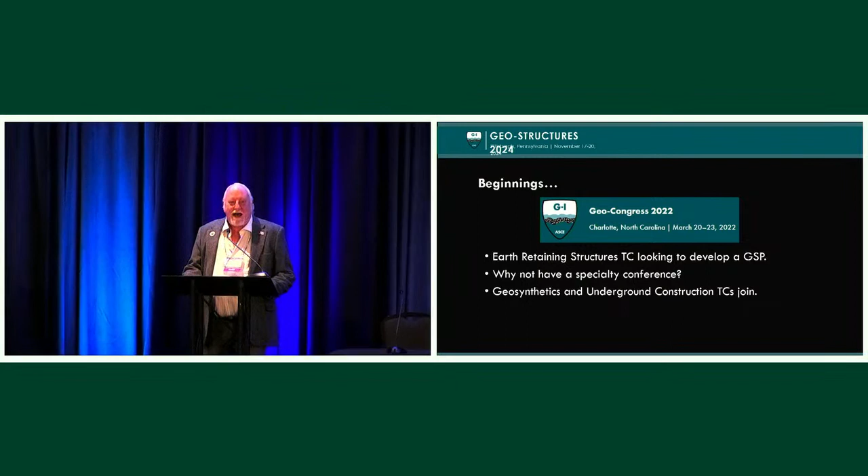I've had quite the odyssey getting us here. This all started back in Charlotte at Geo-Congress 2022. I was attending a meeting for the technical committee, Earth Retaining Structures, and the chair at the time said we need a geotechnical specialty publication. So having just gotten done my term as technical chair for GeoExtreme, I was like, run a conference. And that's a great idea. I was like, yeah, you can get them to write your proceedings, you know, and we don't have to spend a whole lot of work. Right, that's a great idea. Jay, can you take that on?

And I had yes tattooed on my forehead, so why not have a specialty conference? So here we are, like 2.5 years later. We were able to convince the geosynthetics and underground construction technical committees to join in, and it's been quite the odyssey for us and quite satisfying.

But here we are, 2.5 years later. We have 34 exhibitors in the 2 exhibit halls. You won't even notice the difference between the 2, it's all right back behind me. We had 59 papers finally submitted. We have 7 keynote lectures for you, 4 panel sessions, and 2 session panels, which is going to be more informal, and that will be happening concurrently with the technical sessions.

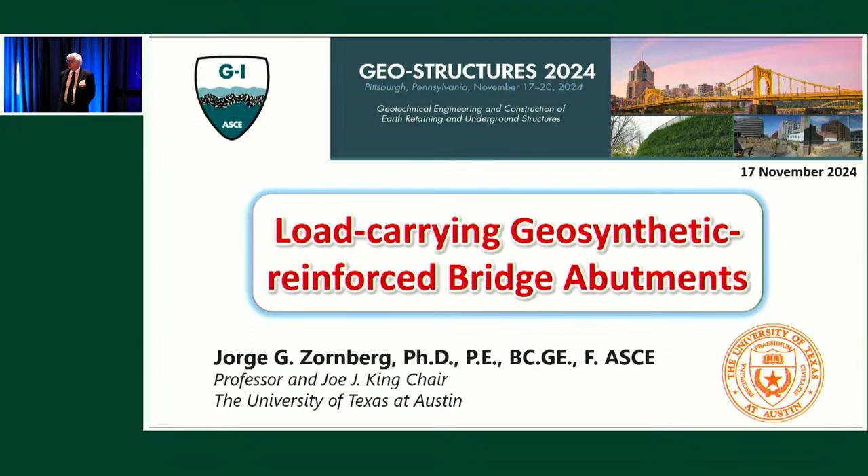My objective here is to tell you that there are many of them that have been built. So if the Department of Transportation tells you, no, I don't want to be the first one building it, there are many that have been built. There are many advantages, and I'm going to show you those advantages in light of structures that have been pioneering in this technology. So not only are there many of them, but they have been built for quite some time, and I'm going to show you the good performance we've had in these structures for 30+ years.

But first, let me tell you, maybe there's one aspect that is more complex than it should be, and that is the terminology. So here you have a wall.

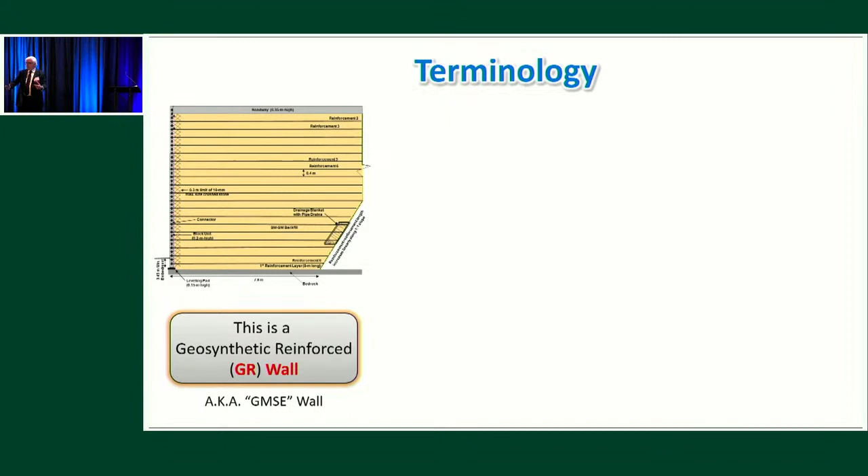This is a retaining wall. I'm going to call it here a geosynthetic reinforced wall. Sometimes we would call it an MSE wall, or mechanically stabilized earth wall. If it has geosynthetic reinforcement, we can call it a GMSE wall. This is the wall you see when you drive by Pittsburgh—you're going to see many of these walls in bridge abutments.

Now, this is still a wall. It's a bridge abutment in the sense that it serves as an approach to a bridge, but we design it as a wall because the load from the girders, the load from the bridge, is transferred more often than not directly to bedrock through deep foundations. So this is still a wall, but I'm going to call it here a geosynthetic reinforced bridge abutment.

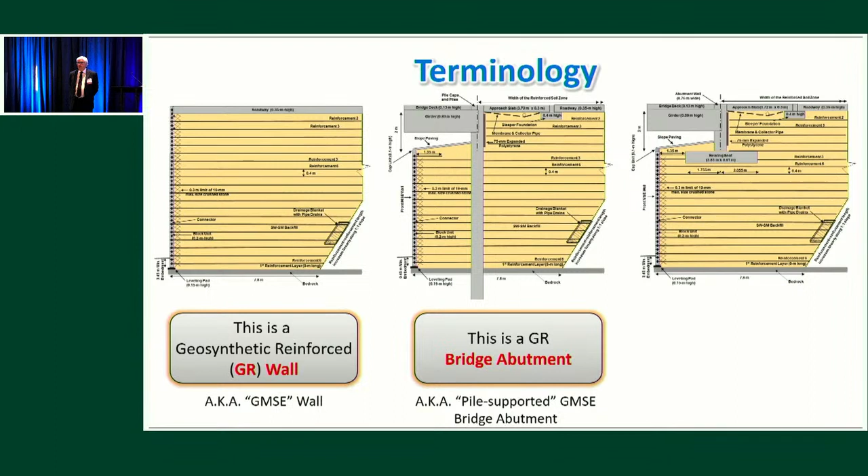This is the most common type, but this is not what we're going to be talking about today. We are going to be talking about a structure in which the load of the bridge is transferred to the surface, to the top of the retaining wall. This is what we're going to call a load-carrying geosynthetic reinforced bridge abutment.

Again, sometimes we'll see it called a true abutment, sometimes a load-bearing GMSE bridge abutment. But how do we design these structures? Because these are no longer just a retaining wall—this is also a reinforced foundation.

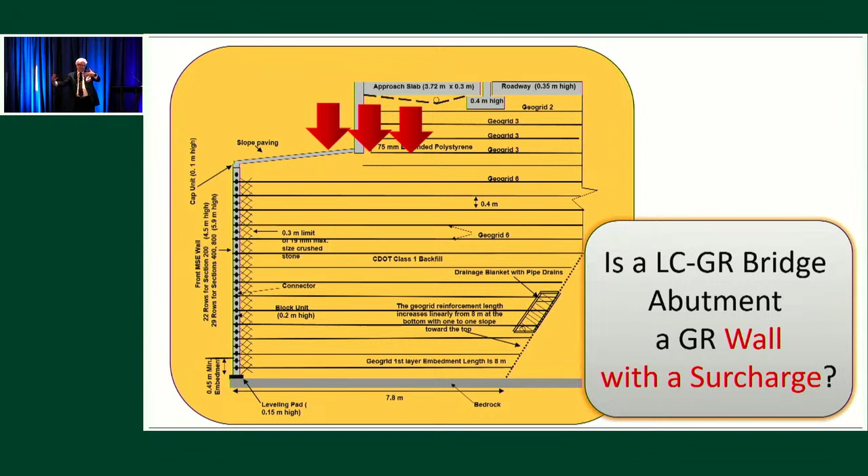So should we design them as a wall with a surcharge? Some of our design guidelines essentially consider that—they design this structure as a wall with a surcharge. Or, since both of them are geotech but come from different points of view, should we design it as a foundation? As a foundation, we may consider plate load testing, bearing capacity versus displacement versus settlement. Or should we design it as a foundation without lateral support? The truth is both are correct, but they represent different points of view for the design of the same structure.

Now, I am not going to be talking too much about design. In this conference, Professor Jie Han will be talking about the difficult, technical aspects related to the design of these structures. Instead, my focus here will be on the benefits and long-term performance, and the characteristics of these structures. Let me wrap up this issue about terminology.

This is the world of GMSE walls, geosynthetic-reinforced walls. Within this world, we have a fraction of them that serve as bridge abutments. Only a fraction of these geosynthetic-reinforced bridge abutments are load-carrying. The great majority that you'll see are really abutments designed as walls, and only a fraction of them—which will be the focus of this presentation—are going to be carrying the load of the actual bridge.

Now, it may get a little bit more confusing. I'm not sure if you're familiar with the concept of integral bridges.

Integral bridges are bridges that do not have joints, and the substructure is integrated with a superstructure. Now, some of the load-carrying geosynthetic-reinforced bridge abutments are going to be integral as well.

In the US, there has been a very productive, very important initiative that led to what we call the geosynthetic-reinforced soil integrated bridge system. Integrated is not integral, but many of them, and I'm going to walk you through what these are, and I'm going to consider them a subset of the load-carrying geosynthetic-reinforced bridge abutments.

With this in mind, I must tell you that not everyone agrees with this terminology. This is for internal consistency. This is what I am going to be using here today. But the focus is going to be on this green subset of load-carrying geosynthetic-reinforced bridge abutments.

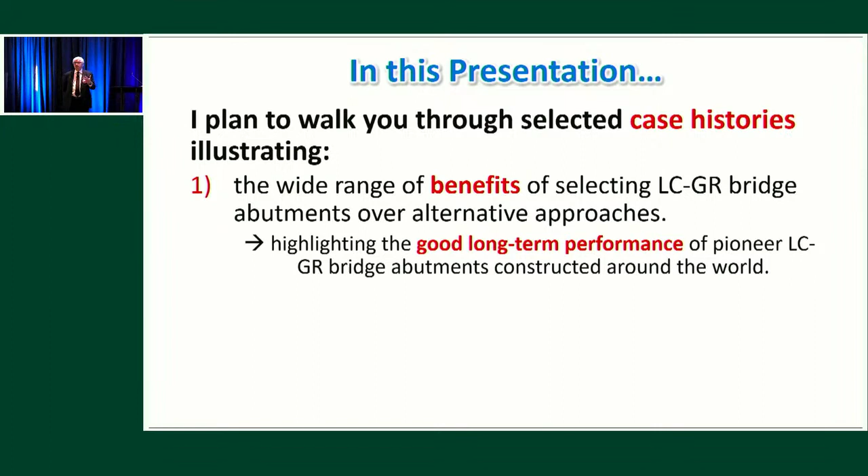In this presentation, I'm going to focus a lot on case histories. The idea is that these case histories will document the benefits of choosing this type of structures versus more conventional structures, such as those that carry the load directly to deep foundations. I'm going to highlight those that have been pioneering, early structures. Why? Because these are already 30-plus years old. And if there were any questions about how these structures were going to perform, now we have good information about this long-term performance. Let me give you some heads up.

Regarding benefits, let me first list those benefits, and then I'm going to walk you through them one by one in the form of case histories. First, they are very often selected because they minimize or eliminate the infamous bump at the end of the bridge.

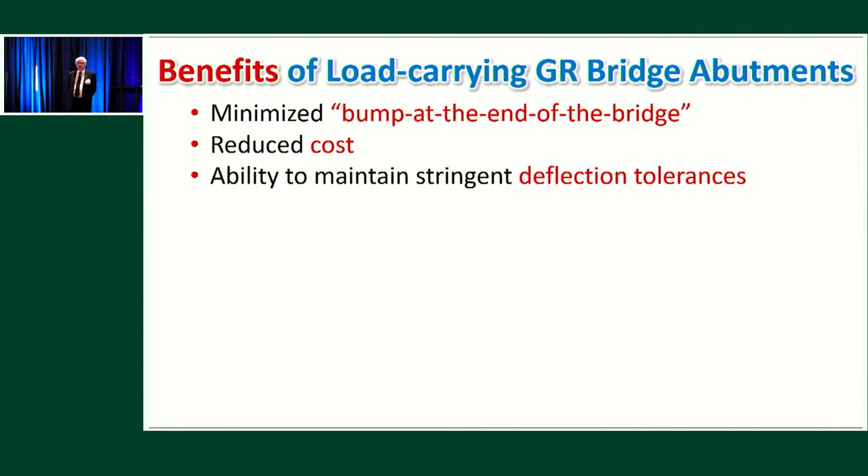A very important reason. Another very important reason: reduced cost. Also, in some cases, they are particularly suitable to maintain stringent deflection tolerances. And we're going to see something about their seismic performance. They are particularly flexible structures, and they perform particularly well under seismic loading.

Finally, I'm going to show you some examples about complex constraints and the need to change unexpected field conditions. All of this, while at the same time, I'm going to show you their improved long-term performance. There are other benefits that I'm not going to focus on in this particular presentation, but for each one of these benefits I do focus on, I'm going to highlight their improved long-term performance.

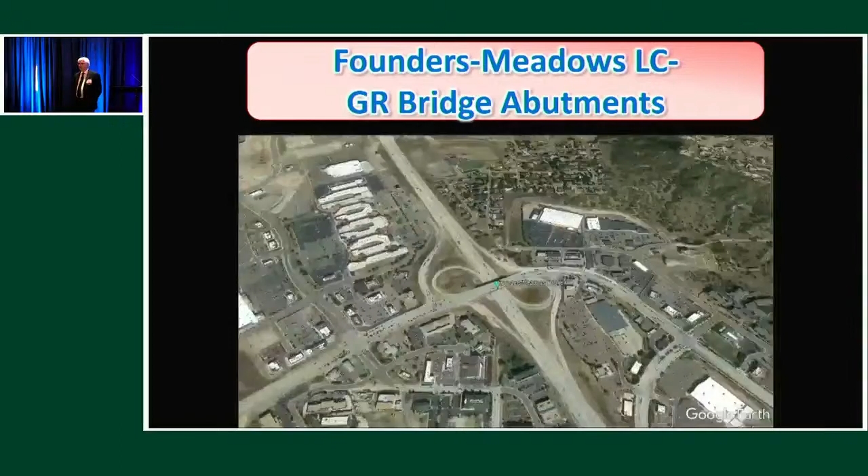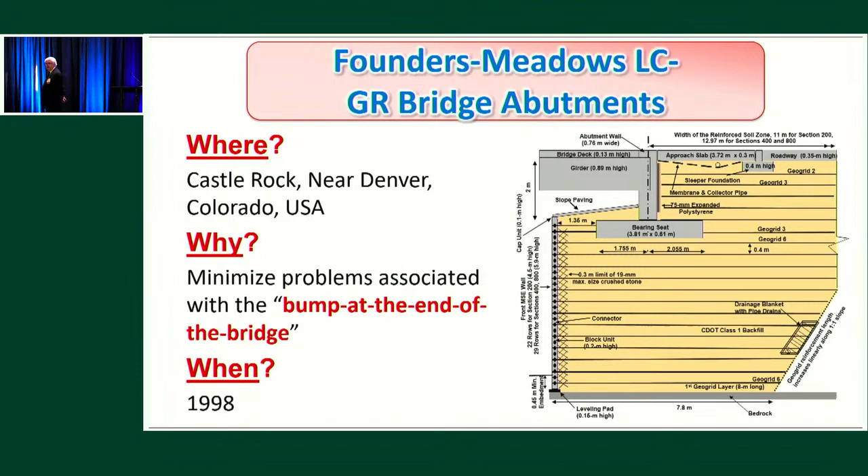It was completed in less than a year in terms of construction. This was a six-lane system, accommodating six traffic lanes and sidewalks as well. It was heavily instrumented. Some could argue that because there were so many instruments, they added to the reinforcement of the structure.

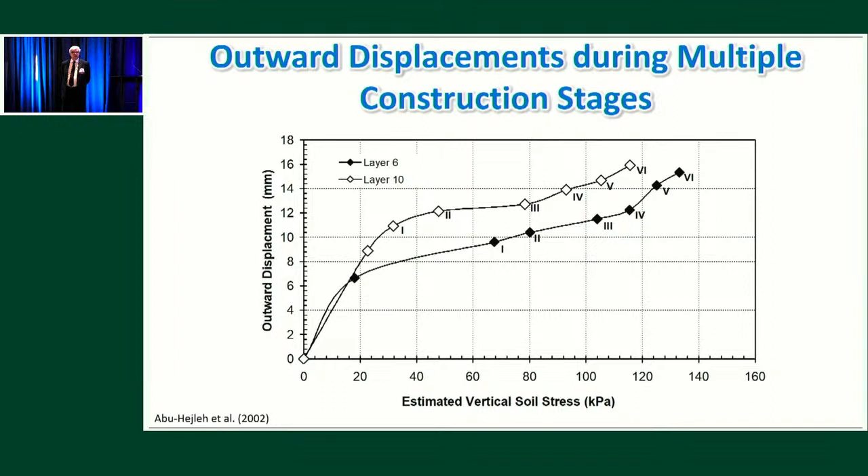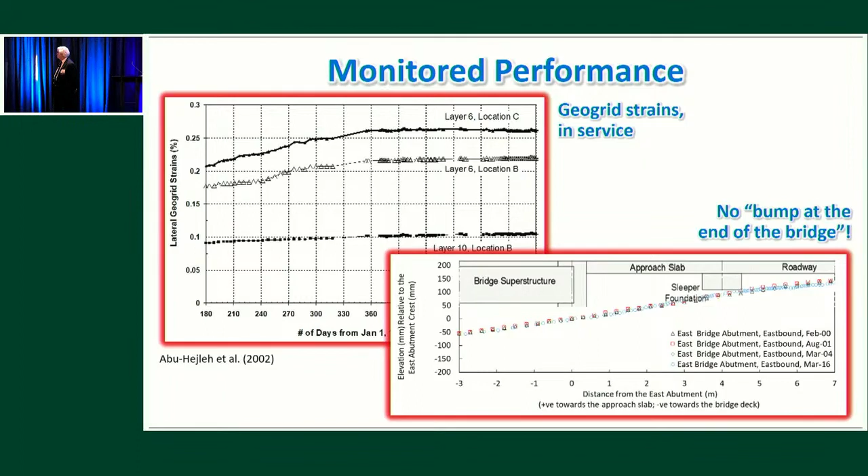So what is the significance of this first structure, the Founders-Meadows load-carrying geosynthetic-reinforced bridge abutments? This constitutes the first type of this bridge constructed on a major highway. Monitoring results have shown particularly good performance overall, and specifically, there has been no sign of the development of a bump at the end of the bridge.

So this was one type of structure here in the US, and I'm going to show you structures all over the world, but let me start here with the US.

The second one I'm going to show you is also the first of its kind, the Bowman Road load-carrying geosynthetic-reinforced bridge abutment. This is in Defiance County, Ohio.

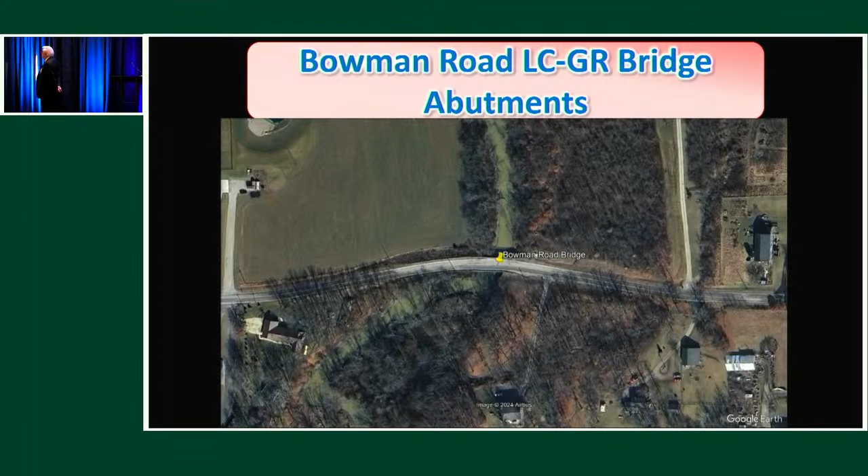This is a comparatively small structure, meant to be designed for low-volume roads and bridges on low-volume roads. This is how the structure looks; some of you may recognize this as a typical cross-section of what we now call the GRS-IBS type of structure.

The main motivation for this system was to reduce costs. The county engineer was looking for alternatives to replace many of the bridges in the county without the cost associated with that undertaking. Working with the Federal Highway Administration, this ended up being the first of its kind, constructed in 2005, shy of some 20 years ago.

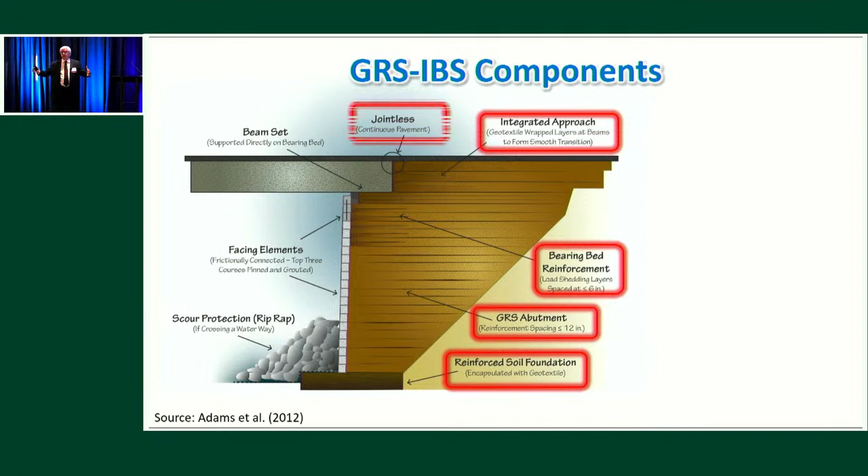This is the typical cross-section of this GRS-IBS system. There are several components; it's a very prescriptive system with very defined components, very specific materials, very specific geosynthetic types, and some limitations in terms of height, span length, and other characteristics of the structure.

Here we have the current site selection criterion. This is meant for bridge spans less than 140 feet, wall height less than 30 feet, comparatively low scour potential, and in principle either competent or improved foundation soils.

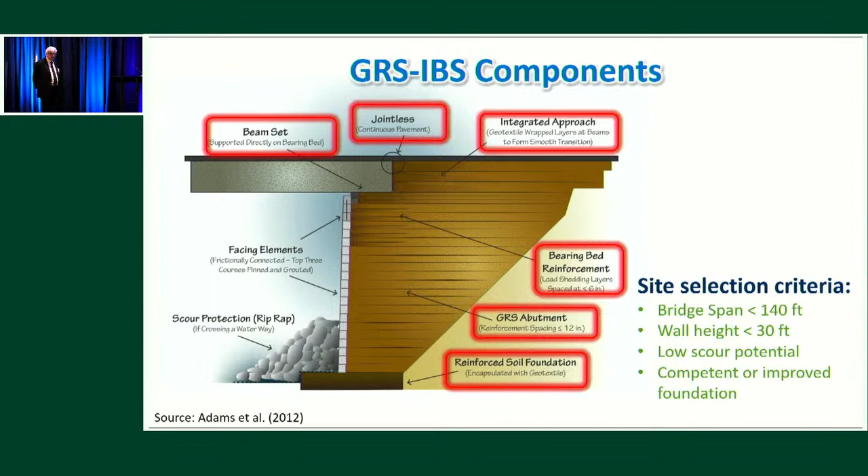Now the important aspect, and this comes directly from Warren Schlatter, the county engineer who originated this initiative in Defiance County: this was constructed leading to a reduction of the span length rather than having the spill-through type of bridge. The fact that they ended up with vertical walls reduced the span length, which led to significant cost benefits for the structure.

It was so simple to construct that it was actually built using the county's in-house labor and equipment. Here we have a view of the actual girders being placed. This led to a decrease in construction cost on the order of 21% compared to conventional bridges, and it opened in 47 days. Considering this was the first one, Mr. Schlatter indicates that now they can build the same type of structure in perhaps half the time, based on the experience they've gained over the years.

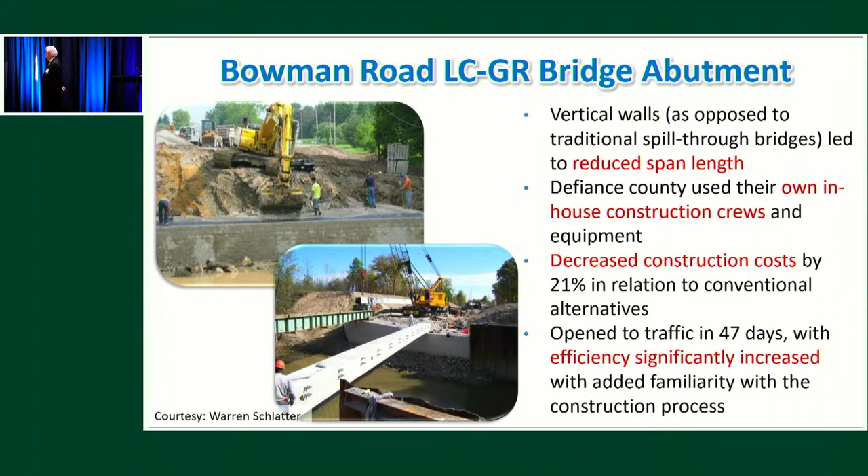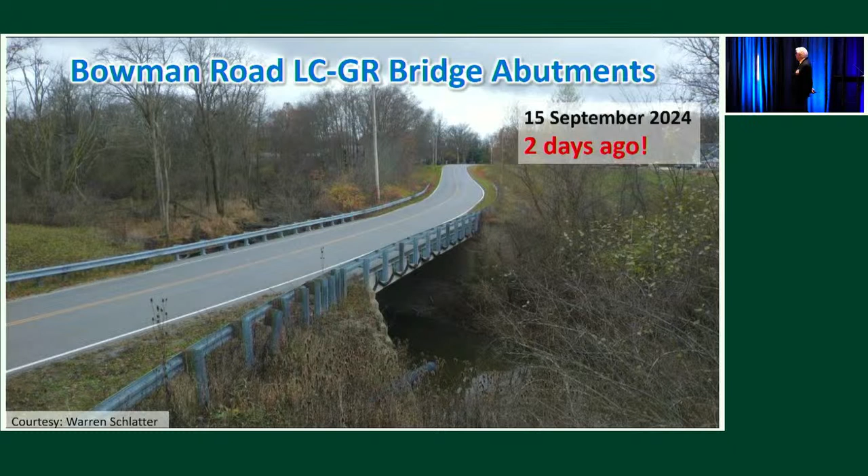This is a view of the structure in August 2005, some 20 years ago, right after construction. But this is from September 15, 2024—today's the 17th, so 2 days ago. This is how the structure looks essentially right now. It has performed excellently over the years.

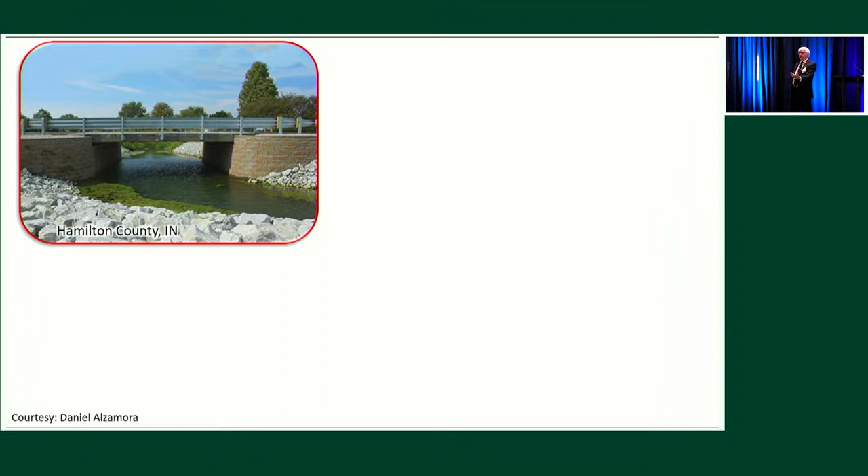And this was implemented in a series of additional structures all over the US. Here I'm just showing you some of the structures that followed this pioneer structure in Defiance County.

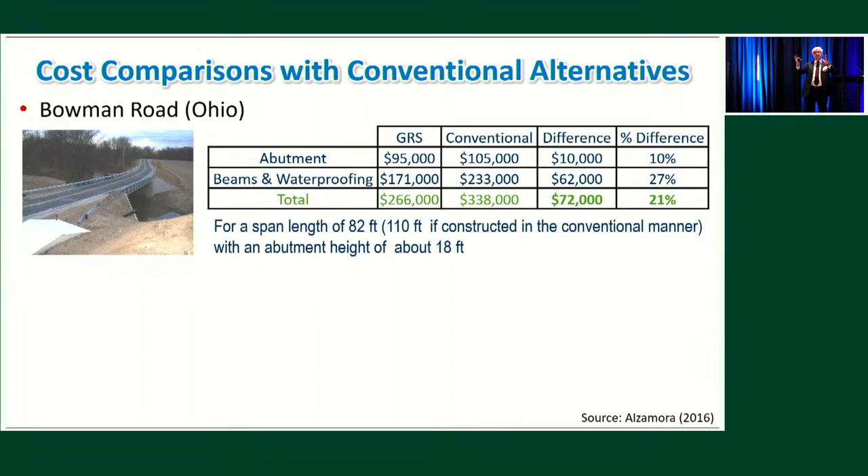When it comes to comparison of cost, this is coming from Daniel Alzamora. This is how they came up with the cost benefits of this structure in relation to conventional structures, some of it coming from the abutment itself, some of it coming from the fact that you're decreasing the span length in comparison to other alternatives. But over the years, these benefits can be even more improved because of the additional expertise gained by refining the construction techniques and having crews that are more experienced with this particular system.

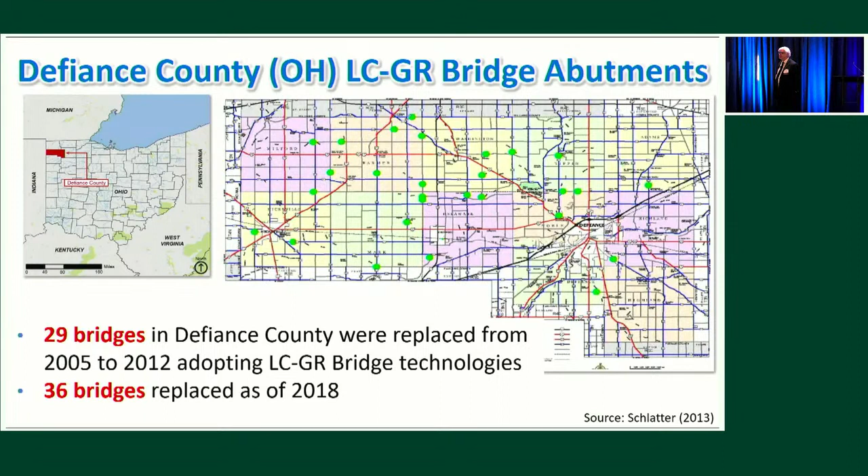That's why Defiance County is probably the county today with the most GRS-IBS structures in the nation. Defiance County, in the northwest of Ohio, has had some 36 bridges replaced using this technology as of 2018. And it's not only in Defiance County, but Pennsylvania is one of the states that has benefited from this type of structure the most.

So what is the significance of the Bowman Road load-carrying geosynthetic-reinforced bridge abutment? This project constitutes the first GRS-IBS. It validated the objective of its selection, which is a cost-effective solution.

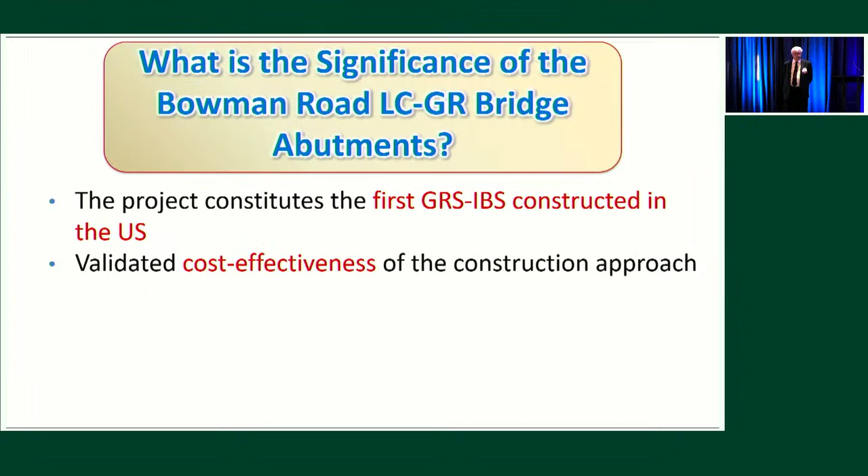Monitoring results - this structure was monitored. Some other structures were more significantly monitored, and they confirmed the good performance of the system. This actually became the precursor of what ended up being the Every Day Counts initiative.

You may wonder what is so different between the two different structures that I showed you, and they are different - we design them differently. I'm not going to get into the details, I'm just going to tell you what the differences are in the design. This is a little bit of a sidetrack, but even though my focus in this presentation is the case history, I'll show you a bit about this.

So what design methods do we have available in the US for load-carrying geosynthetic-reinforced bridge abutments? What are the main differences between one design method and the other? Many would argue that the main difference is that in the GRS-IBS, a very important characteristic is that the vertical spacing of the reinforcements is particularly small. According to the guidelines, it needs to be less than a foot - more typically 8 inches. That's the vertical spacing of the structure. Some would argue that that's the main difference.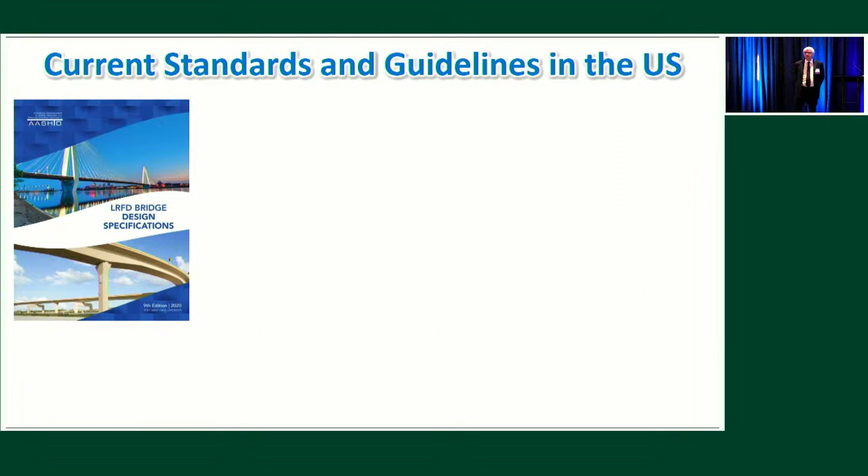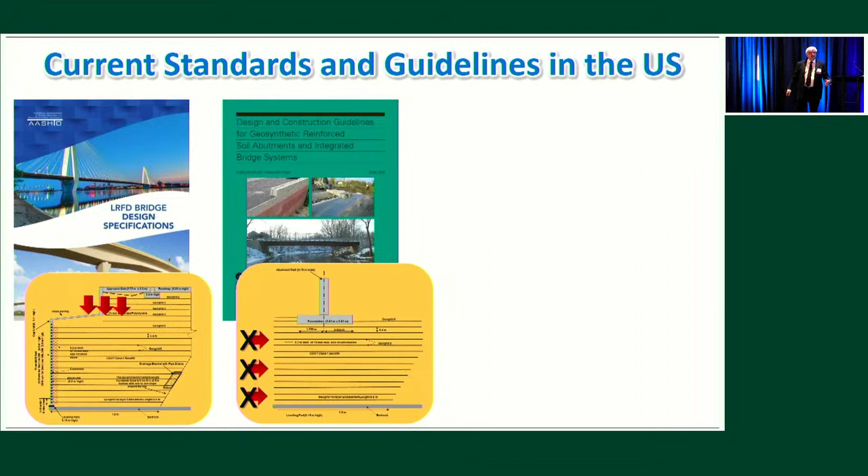That's not how I see it. The way I see it is that the AASHTO approach considers the design of a wall with a surcharge, and that's how we build the design method that follows into this. On the other hand, the GRS-IBS guidelines look at this from the perspective of a foundation - what is the load settlement response of this type of structure? I would argue there is no right or wrong. Both approaches have merits, either starting as a foundation and checking that the settlements are adequate, or starting as a wall and checking that the settlements are adequate, or starting as a foundation and making sure that the lateral supports and internal stability are adequate.

Very recently, or reasonably recently, I want to call your attention to 2 references that attempt to reconcile these potential differences between these 2 design guidelines. One is the result of an NCHRP project that essentially led to some recommendations for AASHTO implementation on how to handle, within the AASHTO framework, cases with comparatively small vertical spacing. If you Google it, you're going to pick it up very quickly - it's NCHRP 24-41.

Or alternatively, you can go to the very latest version of GEC 011, which also incorporates some of this information. This is a 2023 reference, and if you type in Google 'HIF 24002', you're going to find this very latest version - both of them telling you the outcome of some recommendations on how to handle, within the AASHTO framework, comparatively small vertical spacings.

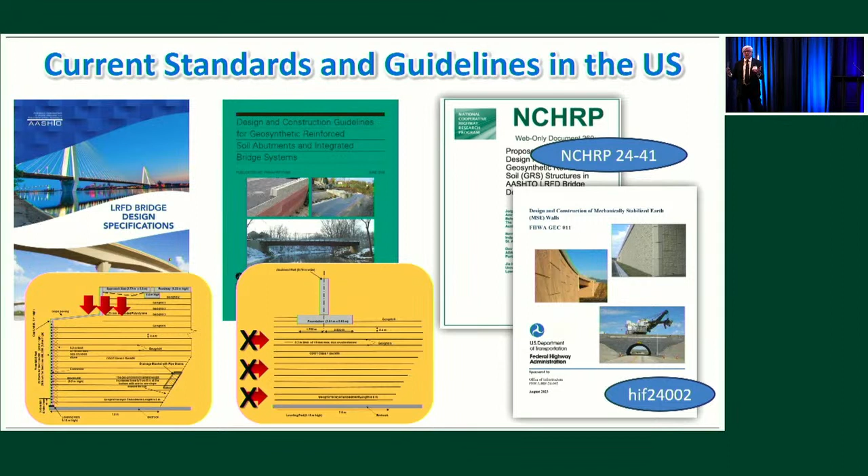But in a nutshell, essentially, the vertical spacing may affect some aspects of the determination of the maximum of the ultimate tensile strength that we adopt for design, and several other aspects. For example, for the maximum, the ultimate tensile strength in the convention, and by the way,

AASHTO nowadays has several different systems for you to design MSE walls. However, when it comes to load-carrying geosynthetic reinforced bridge abutments, I would say, and maybe G can correct me if I'm wrong, the only one that would technically apply is still the simplified method.

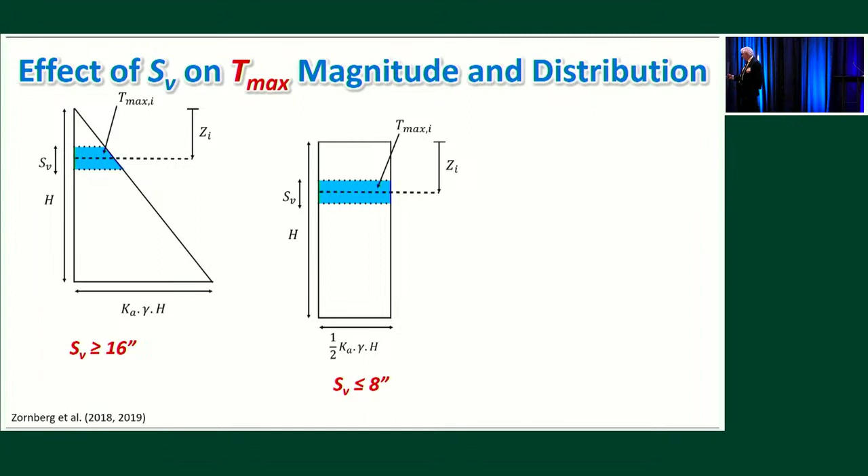And in this particular case, we do have the conventional way of defining the maximum tension in the different layers in the reinforcement. Essentially, this refinement, the proposed refinement, indicates that we're going to go from this distribution to a uniform distribution with depth to define the maximum tension in the reinforcement, depending on whether the vertical spacing exceeds 16 inches or is below 8 inches, and somewhere in between if your vertical spacing is somewhere in between.

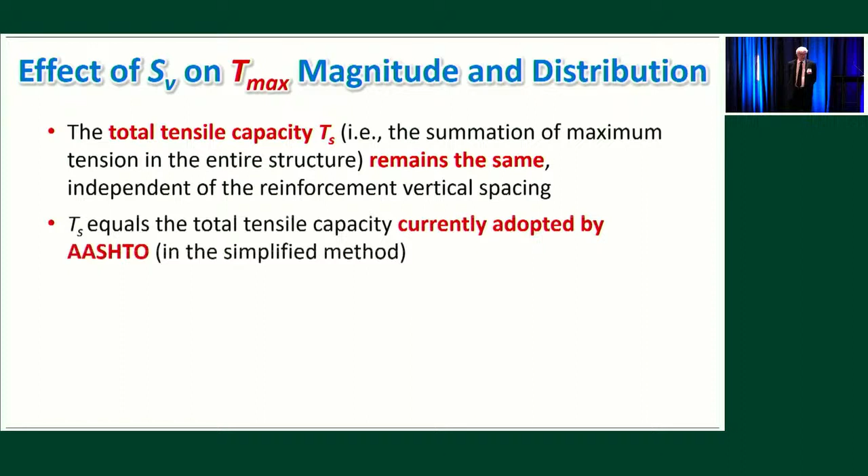The main aspect in this case is that in both cases, the tensile capacity, that is the summation of all the reinforcement forces, remains the same. All right, so this was the small sidetrack that I wanted to tell you about the design. But again, I'm back to my main route, which is not regarding design, but is about benefits.

So we talked about two benefits. One is minimizing the bump at the end of the bridge. The second one was cost. Let me tell you about the third one, and I'm going to take you to Japan.

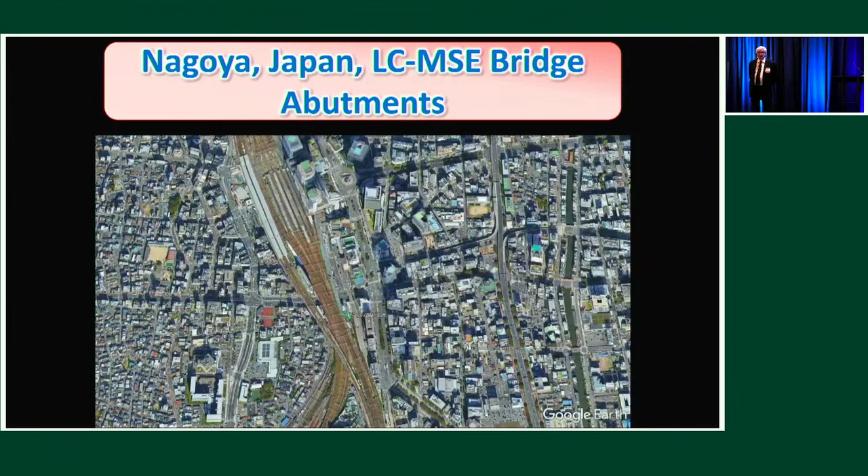Very different type of structure than the one that we designed here in the US. This is going to be in Nagoya, Japan. In Japan, the design of these structures, actually for railway systems, is particularly well established. I'm going to take you to the first of this type of structure, which is in the Tokaido Shinkansen rail line. This is the bullet rail line in Nagoya, Japan. And one of the main reasons for the selection of this type of system was the need for this high-speed railway to maintain very tight tolerances.

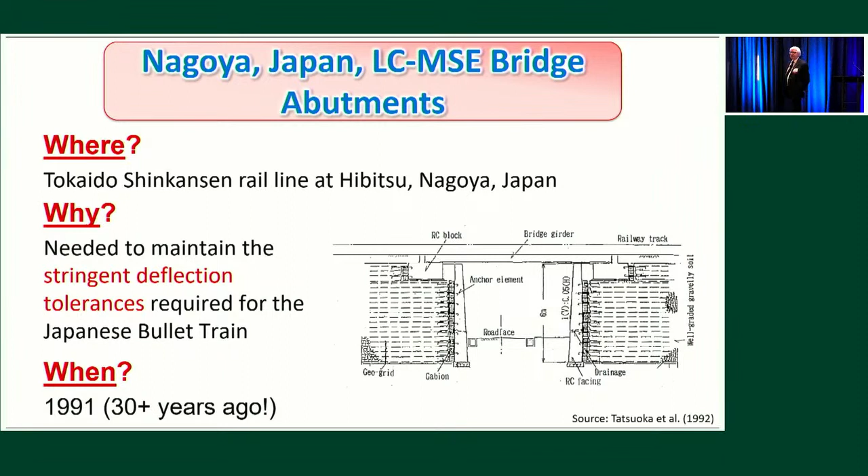This is 30 plus years, probably the oldest of these structures, what we're calling here in this presentation load-carrying geosynthetic reinforced bridge abutments.

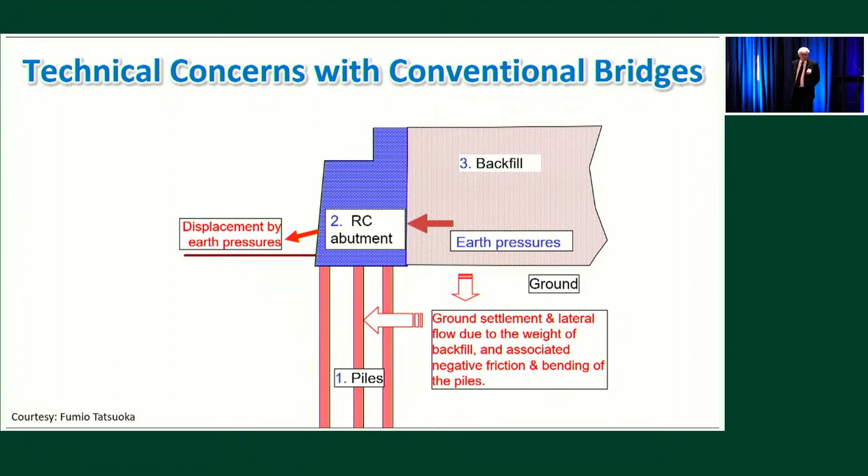I have borrowed this following slide from Professor Tatsuoka that highlights the different potential concerns when designing a bridge abutment with conventional pile foundation. So we're going to have the lateral earth pressures acting, and these lateral earth pressures will lead to settlement, potentially down drag on the piles, potentially lateral flow on these piles, lateral displacements on the facing of the reinforced bridge abutment, and on the reinforced concrete abutment.

And here we have the bearings. Unless this is an integral bridge, you're going to have the significant concern of maintenance with these bearings. And particularly when we have an earthquake, all these impact of settlements and lateral earth pressures and concerns with the maintenance of the bearings are exacerbated.

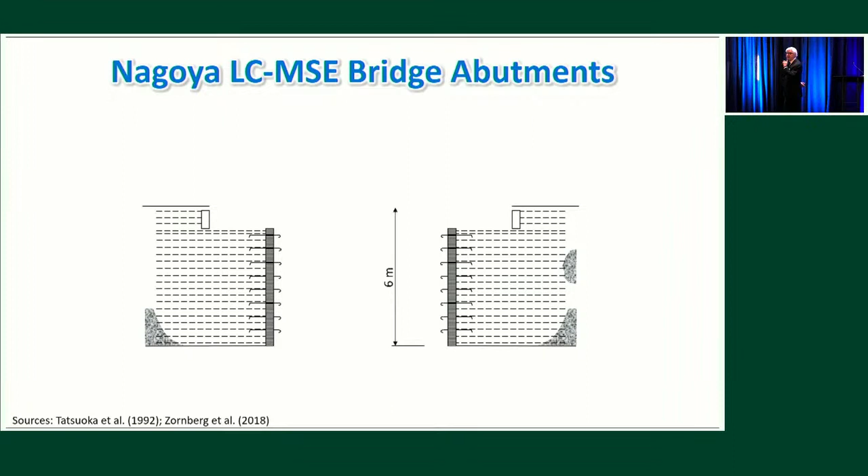So, but in this particular case, I'm going to walk you very quickly through how this structure is constructed, very differently than what we do. And the main difference is that they rely heavily on the rigidity of the facing. Most of our designs in the US, we have a facing and we need it, but typically we do not account for the contribution to stability of the facing system. That's not the case in Japan.

So this structure, this is a geosynthetic, in this particular structure was a geogrid reinforced wall. And notice that in the facing, there are some gabions. Actually, this was wrapped around geogrids that had particularly clean gravel at the facing. But notice that in this facing, we have some anchor elements.

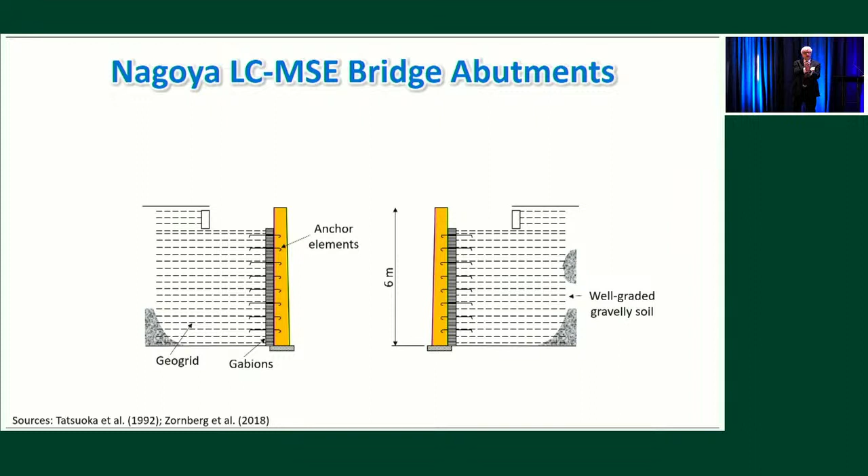The reason that they have these anchor elements is that they are going to subsequently cast in place a rigid full height facing. These full height rigid facing will be integrated to the reinforced wall structure. So now when we load this system, part of the load is going to be taken by the rigidity of these rigid full height facing. So here we have the footings, and eventually we have the girders for the bridge, and this is typically for railway systems.

So here we have the railway tracks. So this is how this particular system was typically constructed.

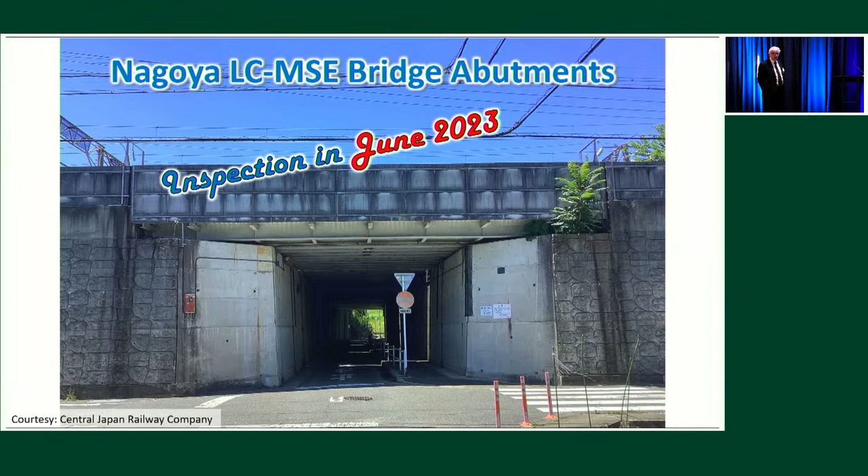It successfully addressed the main objective of this system, which was to control the tight deflections needed for the railway system. It probably corresponds to the first of its kind. Some would argue the concept, but I would still consider this a load-carrying geosynthetic-reinforced bridge abutment, even though some of the load is transferred to the foundation through the rigid facing.

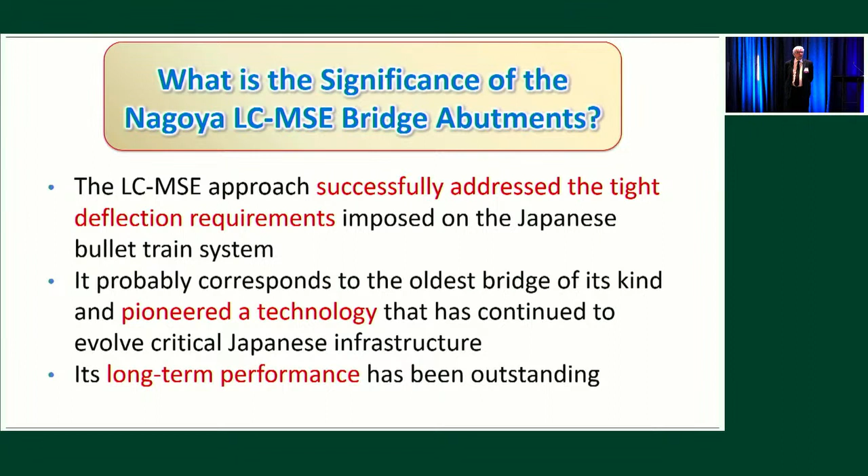And the long-term performance has been outstanding. This was the first out of 3 generations of this type of system, but they have all been intended to support the railway system, the high-speed railway system in Japan.

Next, also in terms of benefits, I'm now going to take you to Chile. This is the San Francisco, load-carrying geosynthetic-reinforced bridge abutment. In this particular case, this structure was constructed as an overpass for a railway system in the O'Higgins region in Chile. The main reason for this selection was to satisfy both static and seismic stability conditions.

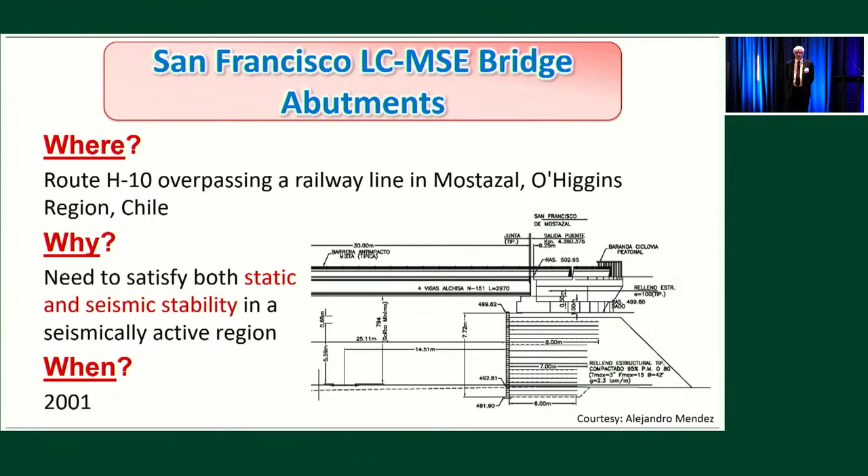Long ago, in 2001, 20 plus years ago. This is a view of the structure during construction. Even though this is in Chile, the method for construction and the characteristics are very consistent with what at the time was the ASCE design method. This is a view of the bridge, again, during construction, and this is right after construction of the structure in 2001.

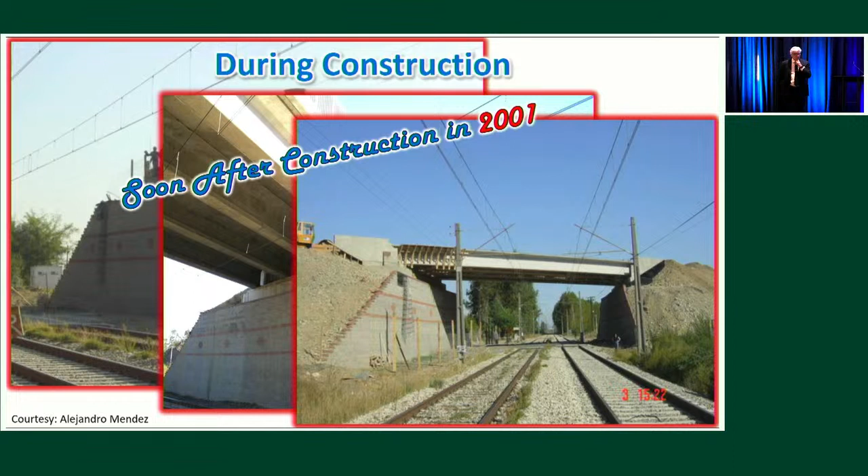Something important happened in this particular structure. In 2010, 9 years after construction, Chile had over 500 victims from a significant tsunami. This was an 8.8 magnitude earthquake, and this is the epicenter of the system, with significant problems in Santiago.

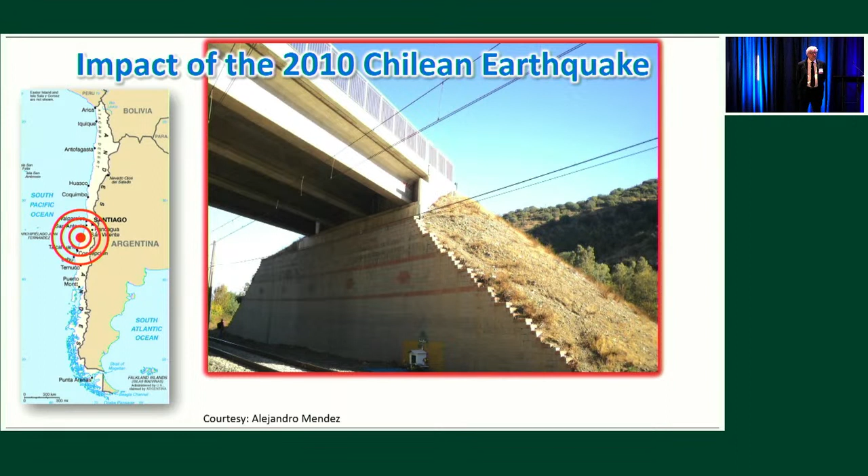This is a view of the structure inspected right after the earthquake in 2010. Oh, by the way, I didn't tell you, but this had a skew on the order of 35 degrees. And the great majority of the bridges that had a skew had failed in this particular earthquake. And here it is.

Other than some cracks attributed to the significant skew of this bridge, this was a bridge that was just a load-carrying geosynthetic-reinforced bridge abutment. It was oriented east-west. And look at the construction. I'm going to call your attention to these vertical steel bars.

They are called - I don't know what they call it - they call them seismic bars. My friends tell me that the rationale for these seismic bars is that essentially they are supposed to restrain some vertical component of the acceleration during the earthquake. But look - no impact on these seismic bars in this particular structure.

But I'm going to take you to another structure, also oriented east-west, constructed the same year by the same contractor, 2.5 kilometers away, some 1.5 miles away from this structure, essentially subjected to pretty much the same peak ground acceleration.

And look at it. This didn't have the skew that the previous structure did have, and there was a significant problem with the performance after the earthquake, which was very common in many other bridges affected between the epicenter and Santiago. And look at this - these are the seismic bars, and this is the Las Mercedes overpass.

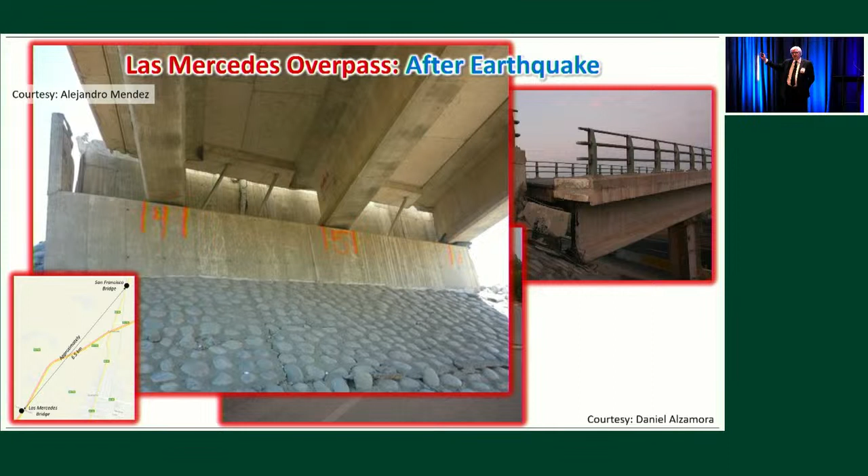The seismic bars are clear evidence of the difference in performance between this conventional reinforced concrete structure with piers, compared with the performance of the load-carrying geosynthetic-reinforced bridge abutment. Very significant difference in the performance, and perhaps one additional, but important, data point in the performance of these structures under seismic excitation.

And a year ago, so here, other than some artwork in this particular structure, this is still performing excellently after some 20 years since its construction.

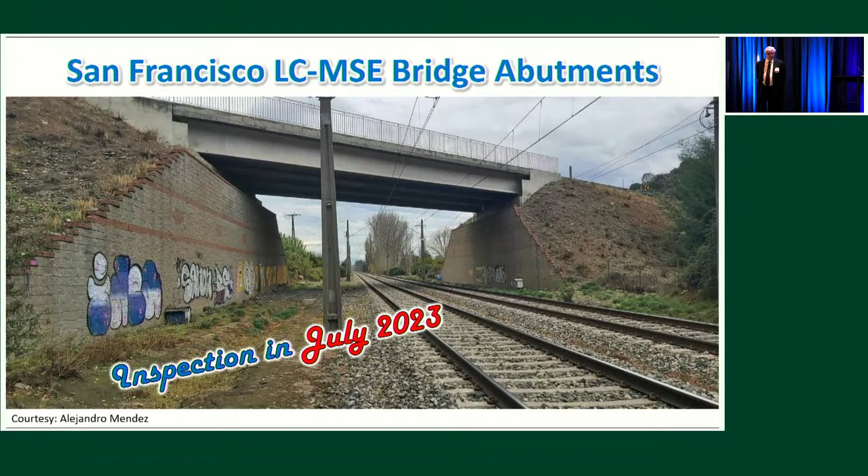So the significance of the San Francisco load-carrying MSE bridge abutment: it successfully demonstrated the suitability of this system for their performance, including seismic stability. This was tested and successfully passed the test that many other bridges did not pass after the 8.8 magnitude earthquake in Chile in 2010, and recent inspection after 20 plus years has shown the excellent long-term performance.

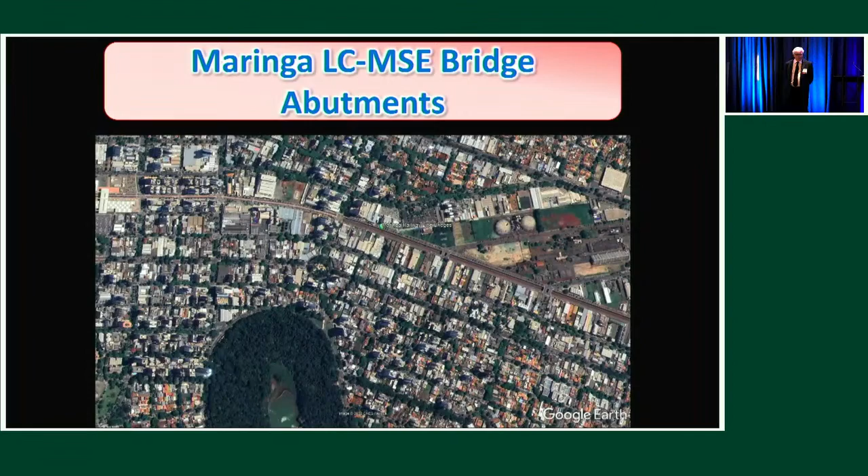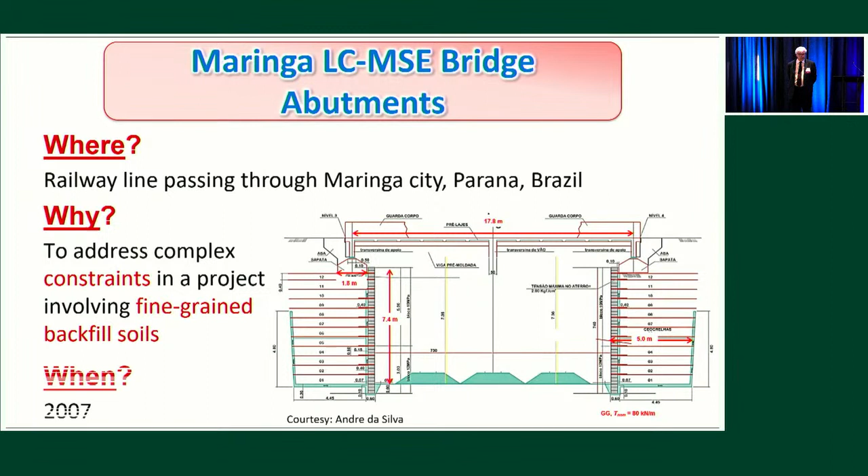One more case history, and I'm going to take you to Brazil. This is the Maringá load-carrying MSE bridge abutment, in the state of Paraná, Maringá city. This structure was particularly relevant because of very significant construction constraints. In addition, it was constructed using backfill that would not meet the requirements for backfill here in the US, comparatively fine-grained soil, back in 2007.

This is a trench that had to be built. There was an undergrade railway, and the idea was to build a number of overpasses through it. Essentially, they excavated first on one side, constructed that side, and then on the other side as well, they were over-excavating the trench, building a reinforced soil structure, and adding the vertical load on top of these bridges in order to create the overpass. Particularly significant, important constraints in the construction of the structure.

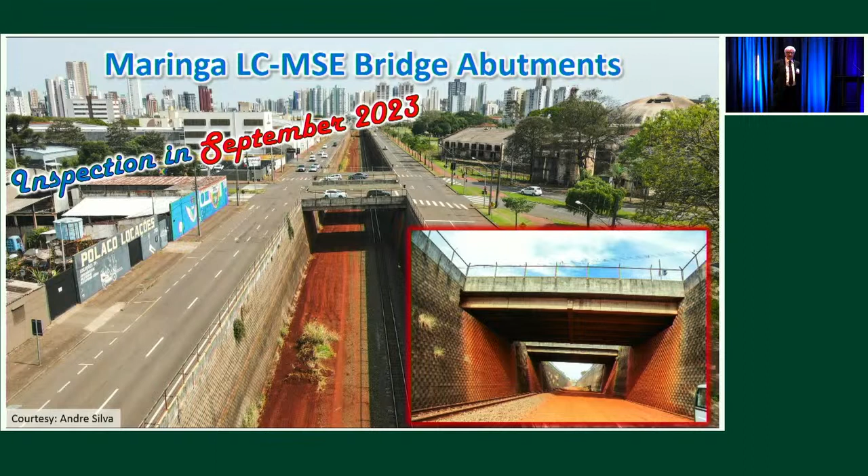This is such a big structure that it's perhaps hard to show you a good picture of the system. This is right after construction in 2007, and this is the performance very recently, a year or so ago in 2023. Again, we selected these structures because they are all early structures and have all been recently inspected. This is a view of the good performance observed very recently.

The significance of this system: the project was successfully constructed using locally available residual soils, red clays, as backfill material. An important aspect was that the idea was to construct this structure without interrupting the railway system, so at no point during construction was the railway interrupted. And it showed adequate performance, some shy of 20 years after construction.

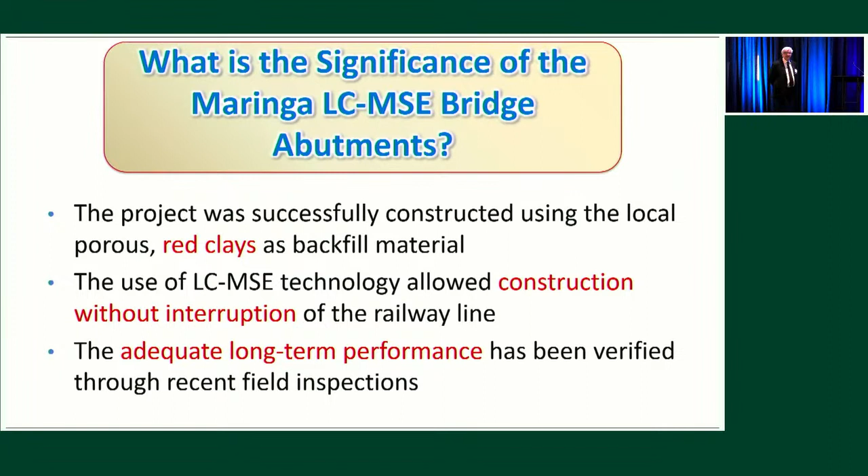So I've shown you a number of good reasons to choose this system: eliminating the bump at the end of the bridge, decreasing costs, good seismic performance, ability to accommodate important constraints, and overall good long-term performance.

But let me now walk you through where these structures are. I'm going to take you on a worldwide tour. Essentially, we've been working on identifying where these structures might be, finding over 50 structures in the US, the Netherlands, and Japan.

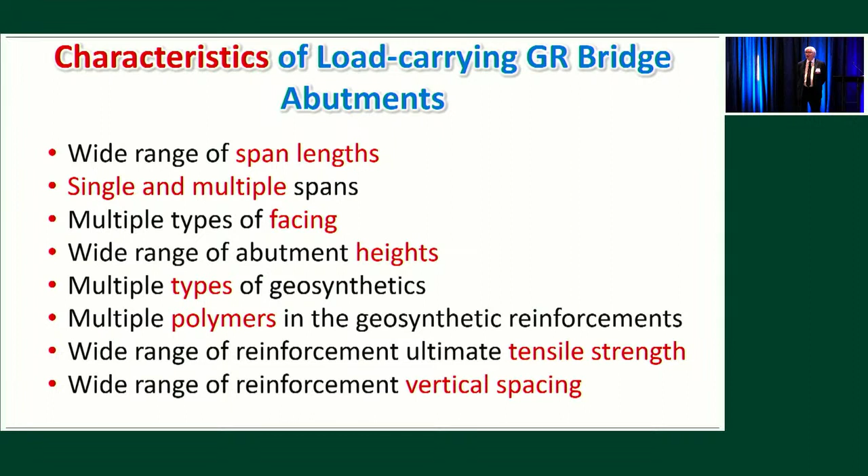So now I'm going to walk you through the characteristics of how similar or different these structures are around the world: span lengths, multiple or single span structures. By the way, GRS-IBS structures are meant to be single span. We'll also look at multiple types of facing, a wide range of heights in the abutments, multiple types of geosynthetics with different polymers and a wide range of tensile strengths that lead to their design, and finally a wide range of vertical spacing.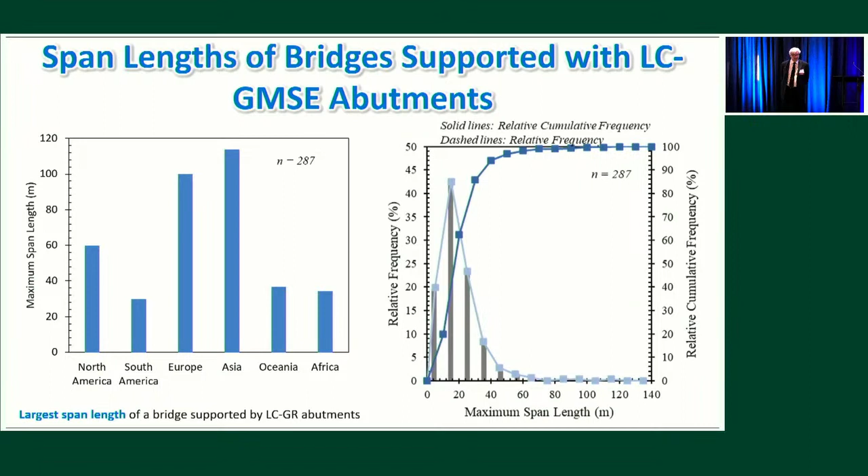This gives you an overview of how wide the range of design has been for these structures. When it comes to span length—the maximum span length per continent—the maximum has been in Asia. But if you look at a cumulative distribution, the 50th percentile is heavily influenced by the 220-plus structures in the US, so the average span length has been comparatively small, even though very significant span lengths have been constructed elsewhere.

In terms of number of spans, even though in the US the great majority are single span structures, many structures worldwide have been built with as many as 9 spans. Let me take you to the one structure that has 9 spans: this is in Australia, the Barney's Point load-carrying MSE bridge abutment. It's a massive structure in New South Wales.

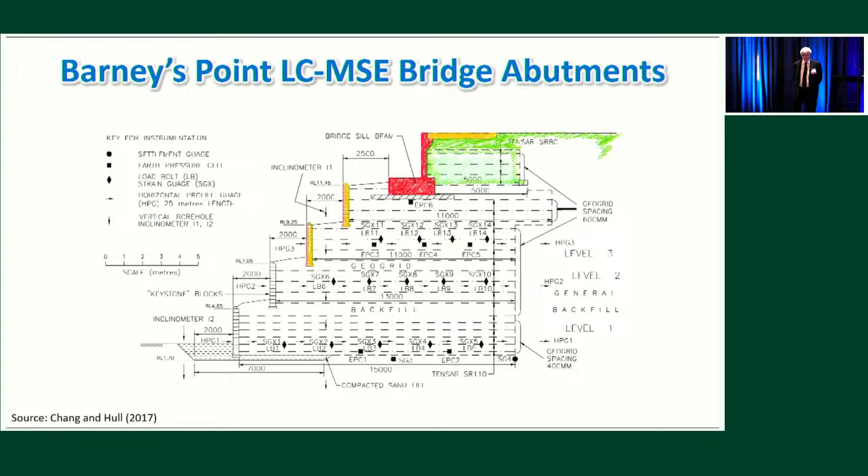This is how the structure looks like. It has 4 terraces of reinforced soil, reinforced soil system with 4 terraces plus the beam. This is a view of the cross-section of the system. And this is the structure right after construction. It was constructed in 1993, so we're talking about a 30 year old system. Massive structure.

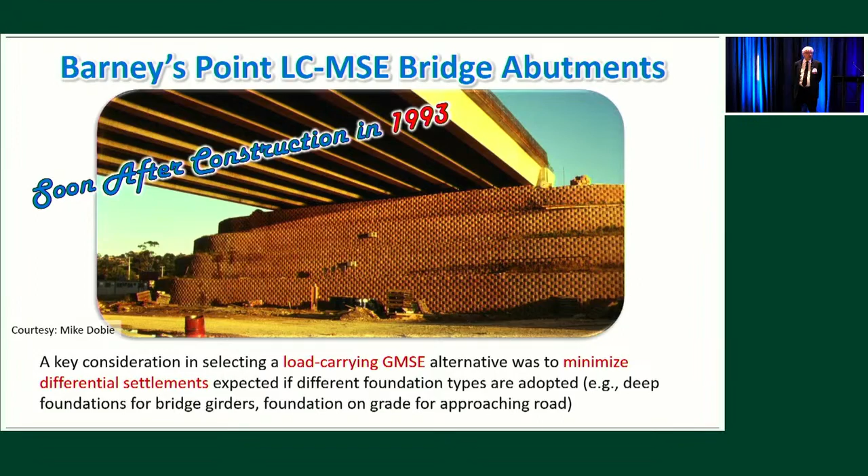The main reason for the selection of this system was potential problems associated with settlements. Settlements were going to occur, but differential settlements were the main concern. And the structure has performed excellently since then.

This is an inspection of the system last year. As you can see, this massive structure has performed excellently over the 30-plus years. This is another view of the structure inspected last year.

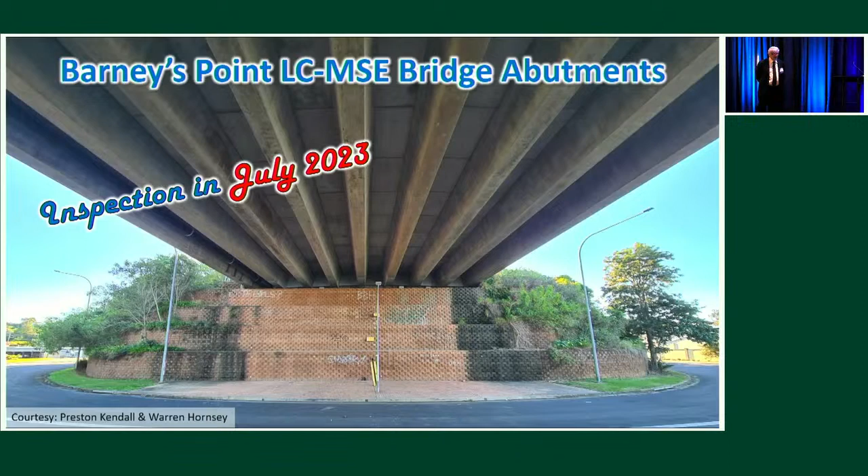And this is a view of the first load-carrying geosynthetic reinforced bridge abutment in Germany, constructed using gabion facing. By the way, a water crossing structure.

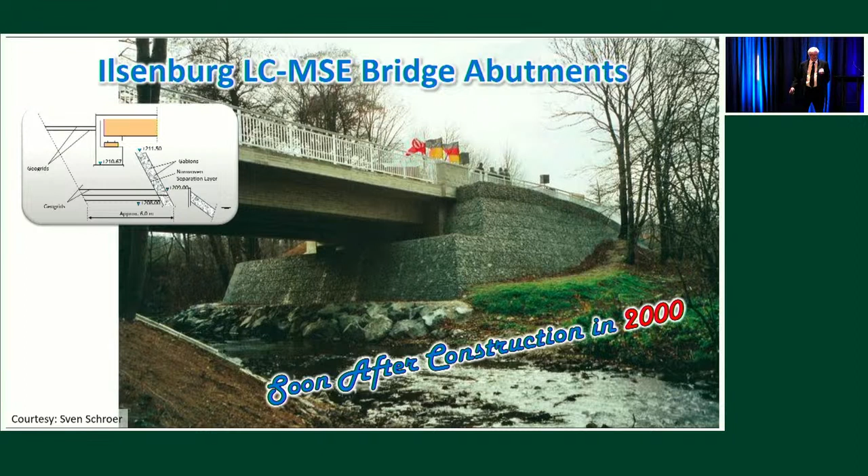This was inspected 20 or so years after that, last year, and the performance of the system has remained as intended and without any particular problems.

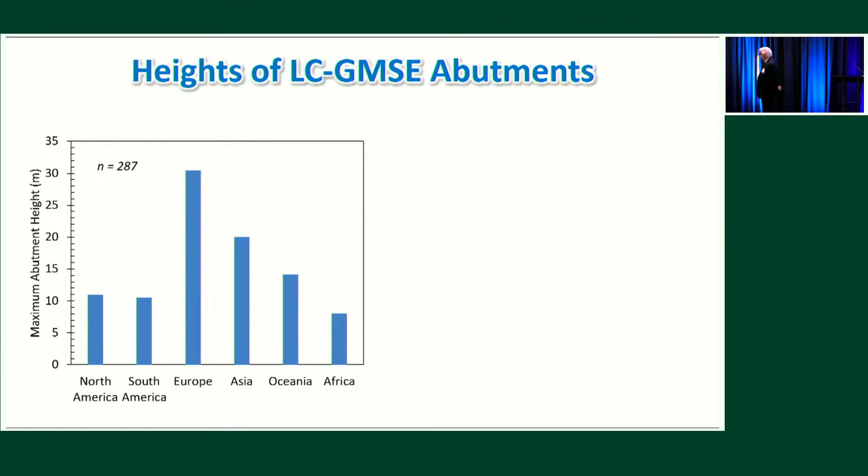So when it comes to the heights of the different structures, there is quite a number. This is the maximum height in the different structures per continent. But if we look at the cumulative distribution, I would say heavily influenced by comparatively small height structures in the US.

So this is the highest structure in South America. I'm showing you this one in particular because I think it's relevant to see that even not necessarily in transportation systems, but also this is making its way into systems such as mining construction. This is the Yanacocha mine load-carrying geosynthetic reinforced bridge abutment. This is a cross-section of that particular structure.

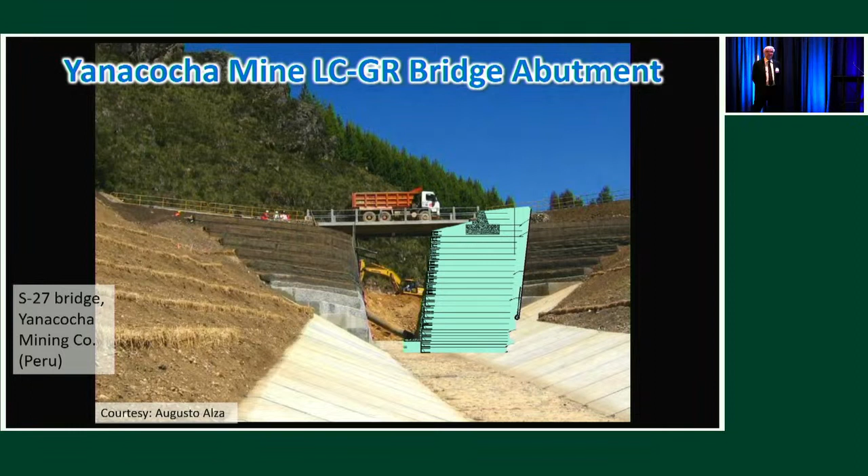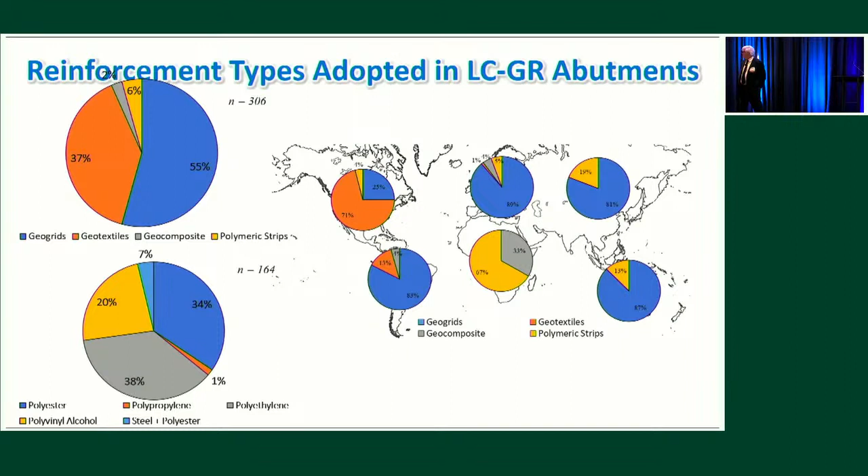And when it comes to the different reinforcement types, I would say clearly geotextiles and geogrids have been heavily used, but the distribution is particularly affected depending on where you look at these structures. In the US, heavily influenced by the preponderance of GRS-IBS structures, the great majority being geotextiles. In most of the rest of the world, the great majority being geogrids. When it comes to the polymer type, these geosynthetics have been primarily polyester and polyethylene.

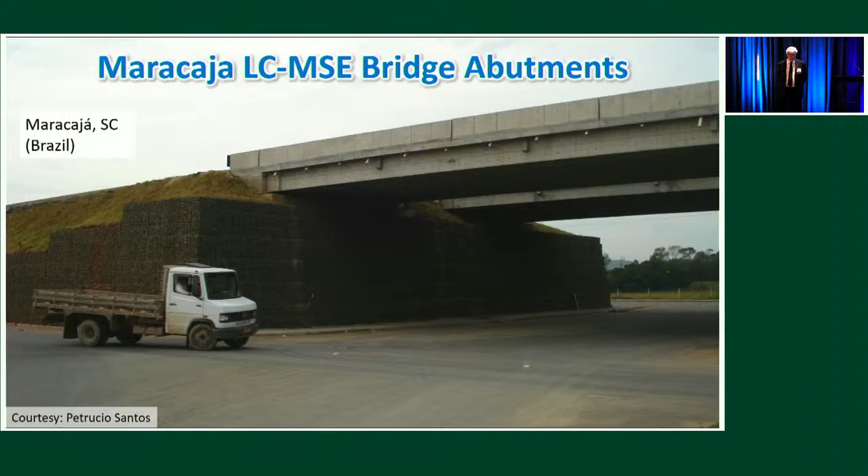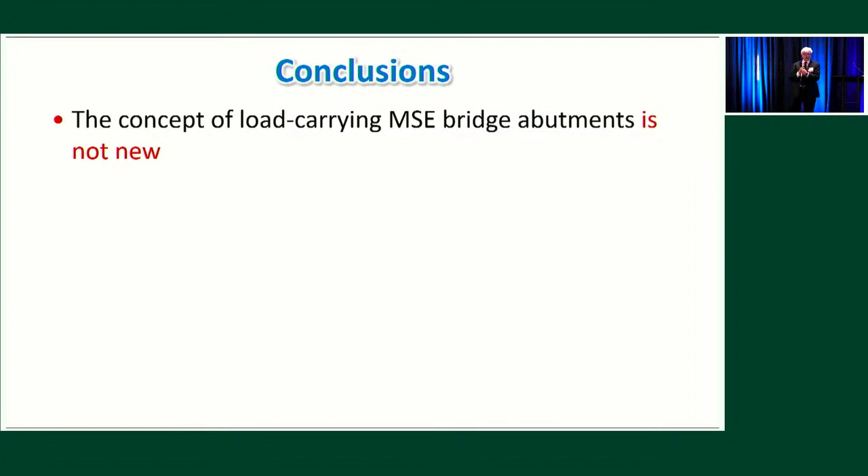All right, so my intention here was to walk you through why to choose these type of systems, what are the different benefits, and what are the different characteristics. Hopefully, I did convey to you that the concept of load-carrying MSE bridge abutments is not a new concept.

And there are many good reasons to choose them. They have been demonstrated to be able to eliminate or minimize the bump at the end of the bridge, and they have certainly led to cost-effective structures. They have been able to maintain stringent deflection tolerances, excellent seismic performance, and accommodate important constructability constraints—all in structures performed between 20 or 30 years ago, and they have all been performing as intended since then.

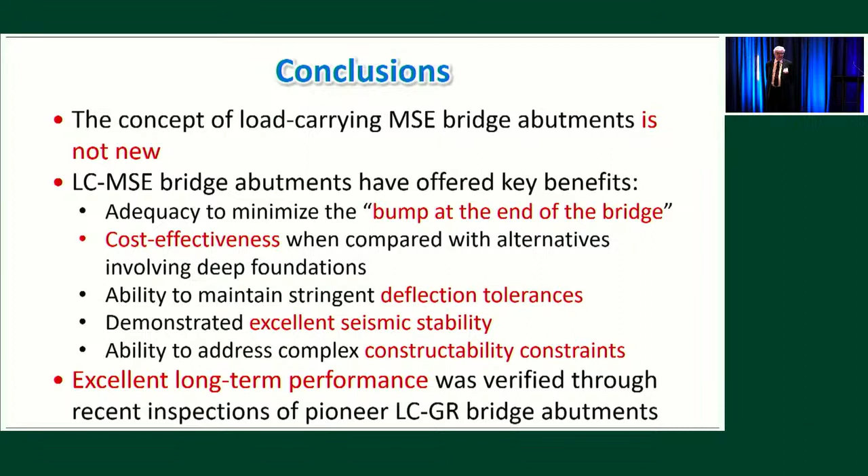In terms of the range of structures, I could say the US, Netherlands, and Japan, for different reasons. In the US, what governs? Low cost. In the Netherlands, what governs? Important considerations regarding settlements. In Japan, what governs? Important considerations regarding seismic performance. So good reasons for the countries that lead the number of structures in this selection of the system.

Span lengths have gone over a wide range, in some cases exceeding 110 meters, and heights exceeding 30 meters. So some of these structures have been significant.

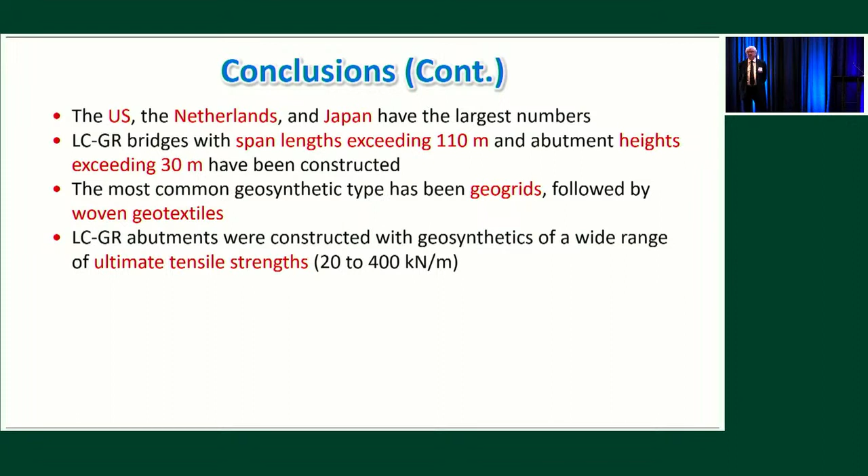Geogrids and woven geotextiles have been the geosynthetics of choice, particularly. And even though in the US we have designed the great majority with comparatively small or low ultimate tensile strength, important structures have been designed with comparatively high ultimate tensile strength.

There are guidelines that require a comparatively small vertical spacing, even though structures with vertical spacing exceeding 1 meter have been designed successfully and have performed adequately. And a wide range of facing selections have characterized the design of this type of structures.

Okay, so after walking you through the benefits and the characteristics of this type of system, this is a collection of information that has been gathered over a comparatively long period of time.

Particularly, I would like to acknowledge the NCHRP, the contribution of my former student and now my colleague, Dr. Morsi, many contributors to the different case histories—including their recent visit and inspection of the comparatively old and early structures—and contributors to the survey, and my colleagues who have worked with me on this NCHRP project. And with that, I thank you so much for your attention.